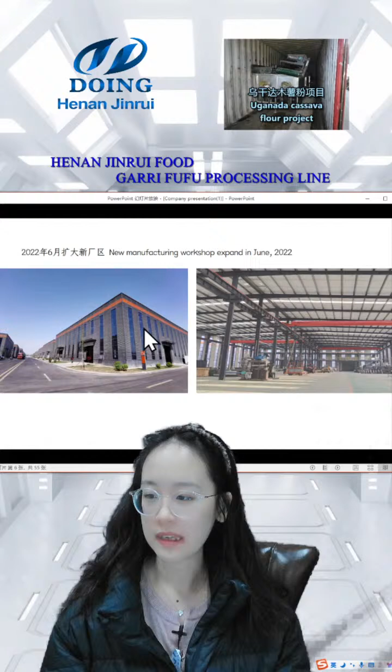This is the factory. Our factory is also in Henan province, but it is nearly a 14 hour car ride to our company. This is what the factory looks like.

And our processing machine is the sweet potato starch production line.

What's your name? Bernard.

Sorry, I may not pronounce it so well, but if you can hear what I said, please leave where you are from. Maybe I will ask where you are from, because we have an overseas warehouse. It's in Nigeria, and it is more convenient for shipping or setting up the equipment, okay?

So here is our processing machine, like the sweet potato starch. We have many different pieces of equipment sent to Ghana, and also DR Congo, and we have an overseas warehouse in Nigeria.

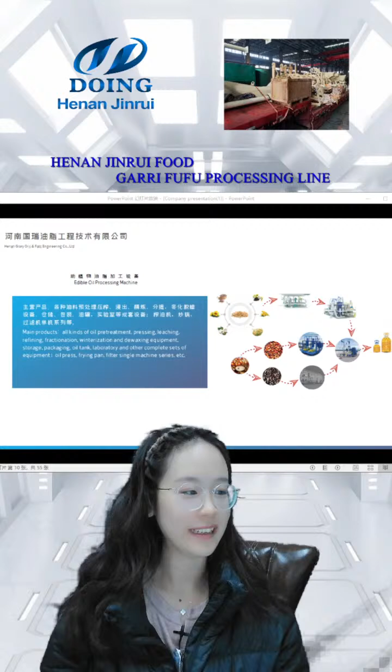Our company also can sell some edible oil equipment like palm oil and soybean oil equipment.

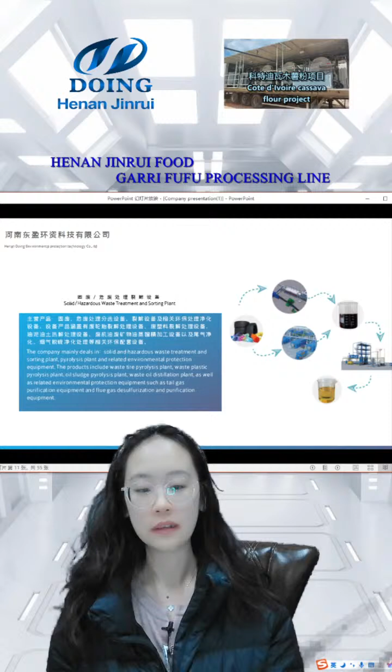And here is something like this - this is a metal and plastic separating machine.

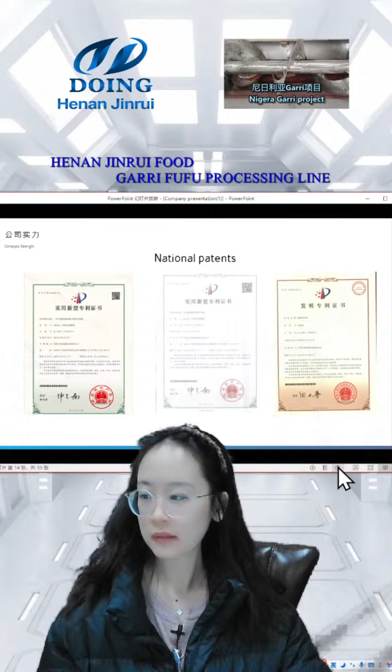And this is our national patent.

So what do you want? Do you want the garri processing line or fufu processing line, and also the cassava starch processing line, or any other? You can tap here.

And I have the 3D animation, I can introduce this for you. This one is our 3D animation for the garri processing line, let's have a look, okay?

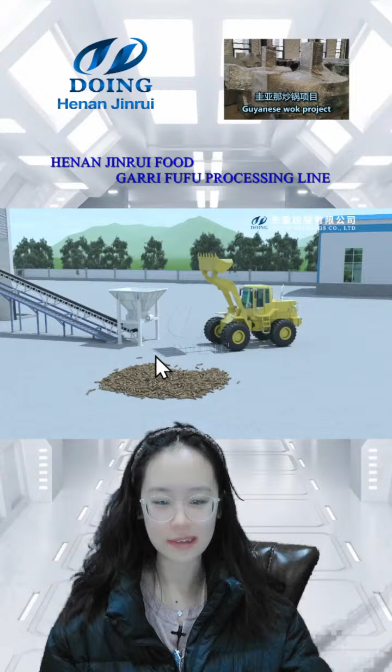So I will introduce this equipment in this processing line. Our equipment is - how to say that - it is like the animation, and I will introduce it, what it can do, what is best, or anything.

First, use the lift to pick the cassava into the feeding hopper. So you can see this feeding hopper, it is shaken underneath at the bottom.

The cassava will be sent on the belt conveyor, and the first machine here is a dry sieve machine, it can...

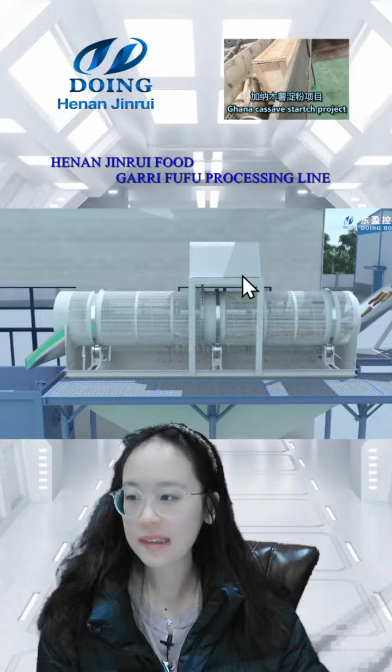And this is our dry sieve. The dry sieve is to friction the cassava in it, and it is rotated, and here comes the debris or the grass and so on.

Hello Bernard, if you are here, please answer my assistant, okay? Hello?

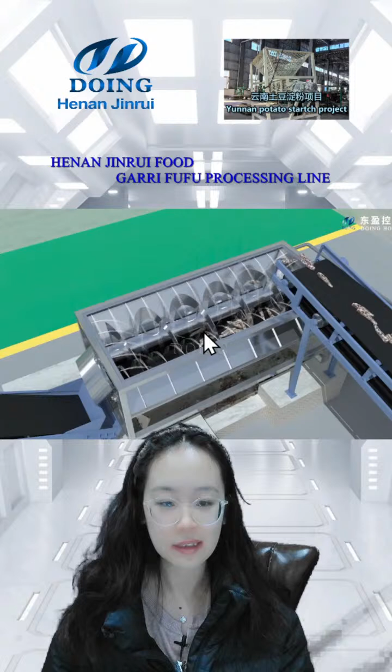In this machine, the sandpaper will friction the cassava surface, so it is easy to clean the cassava skin. And here comes the water. The water also can... okay, salesperson, no problem.

Also the water comes into this machine to clean the sand roller paper, and then the cassava will fall on the belt conveyor again, and go to the grinding machine. The grinding machine makes the cassava into small pieces.

In the grinding machine, if you have a lot of budget, you can also choose the cutting machine, because if the cutting is very fine, the cassava for garri or fufu can be made very thin, and the small pieces will fall into the feeding hopper.

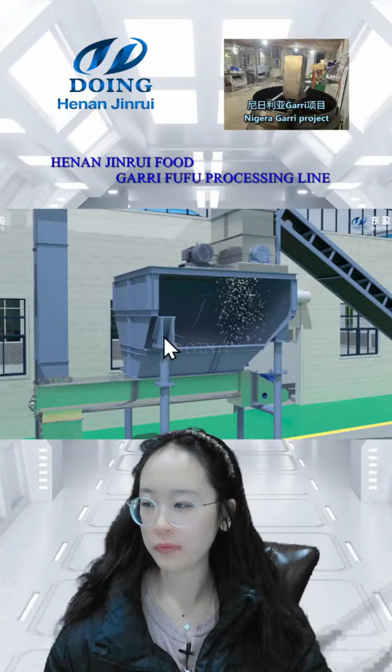Here is the grinding machine again, because the grinding machine can make it even thinner, into small pieces, and go to the flour. And here is the elevator.

It sends the cassava to the tank for fermentation. Our fermentation tank can make the fermentation time shorter, and if you don't need this tank, you can dry it under the sun, that's okay too. But if you use this kind of tank, the time will be shorter.

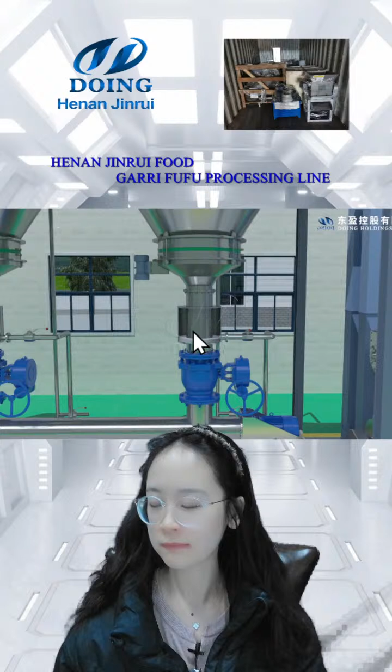Then the cassava goes to the next step. Here is an elevator again, and here is a grinding machine again, because the grinding machine can grind the cassava cake.

Then it goes into the big garri furnace. Our garri furnace has a special feature: it adopts a two-layer design, with heat-conducting oil in the gap between the two layers. Through the heat-conducting oil, the temperature at the bottom of the wok garri furnace can be rapidly increased, thus shortening the time for frying garri and saving your operating time. This is special to this kind of big furnace.

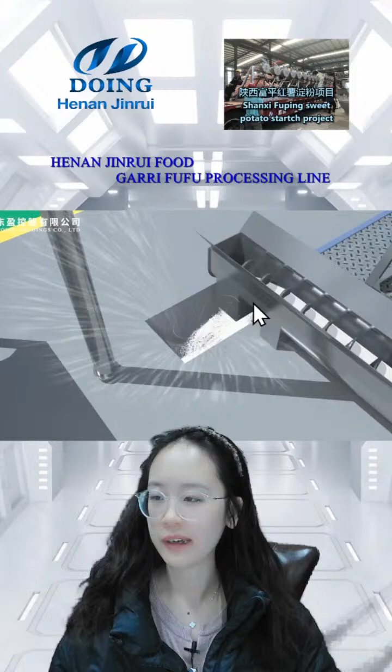Then the garri falls onto the conveyor again - no, this one isn't the belt conveyor, it's another conveyor - and goes to the separation machine, the vibrating machine. Here are two cyclones, and it separates the finest garri, and if any garri is bigger, it will be put into the other cyclone. Here it's ready for packaging.

So here is the whole processing line. If you have any questions, you can ask me, I can answer for you.

And this is the 3D animation. Maybe you want to change one machine or change two, different machines are all okay, because we have different types of cassava grinding or cassava washing machines, and also dehydrating machines.

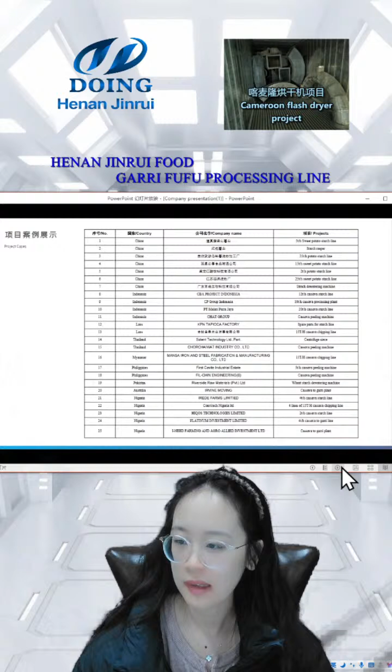And the most important thing is that we have an overseas warehouse. It's in Nigeria. So if overseas customers want our equipment, it can be sent directly to you very fast, because the Nigeria warehouse also has the equipment that you want.

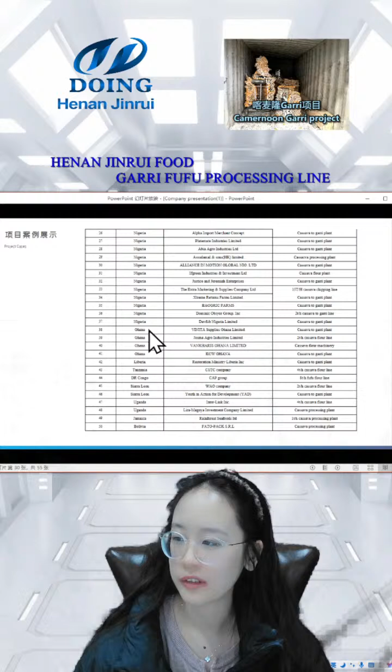Look at here, Nigeria, many Nigeria shipments. And also here is Ghana. Can you see it?

And here is also the potato starch project. This one is in Indonesia, in Nigeria, in Tanzania, and here is the fufu in DR Congo. In Uganda, it is cassava flour.

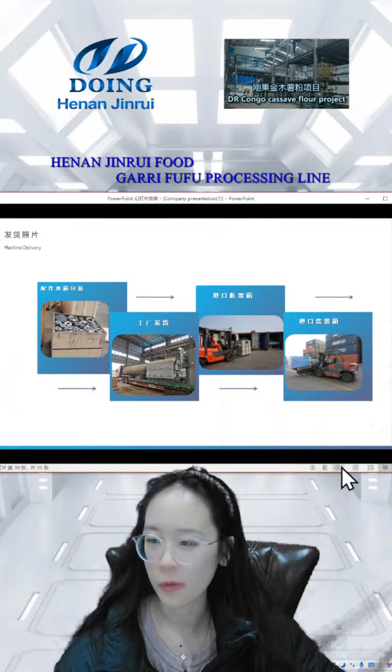And you can see our customers, they are from all over the world. So if you choose our equipment, please believe us, because we can send it very fast, and the packaging is very good, and also our shipment is directly shipping.

I will be in China for the Canton Fair next year. I would love to have a factory tour. No problem, no problem. And welcome to China next year.

And here is the packaging.

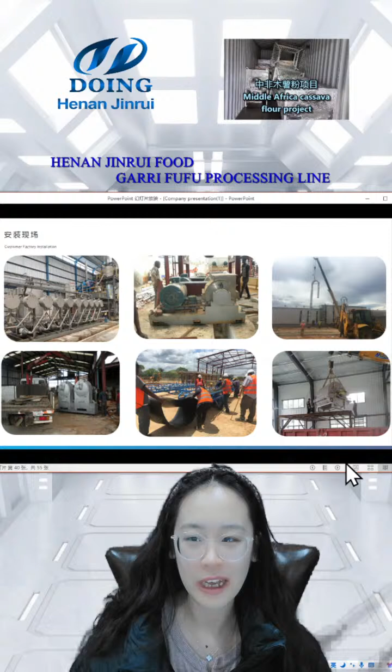But if you want to come to China soon, please let us know, okay? You can directly call our salesman if you have his WhatsApp number. He is in charge of factory installation.

Yes, you can directly point to the WhatsApp number on here.

And the first here is the cassava feeding hopper. It is for short storage of raw cassava and uniform feeding.

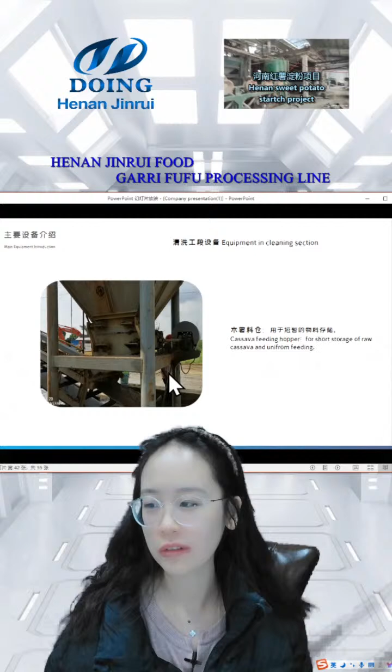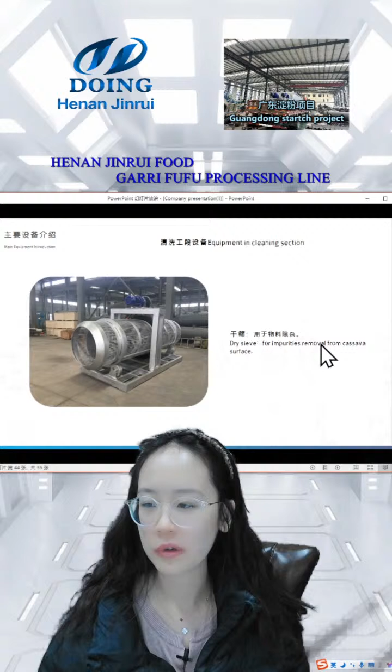Here is a dry sieve. It is very important because it is the first machine in the whole processing line, and it is for friction and to remove the impurities from the cassava surface.

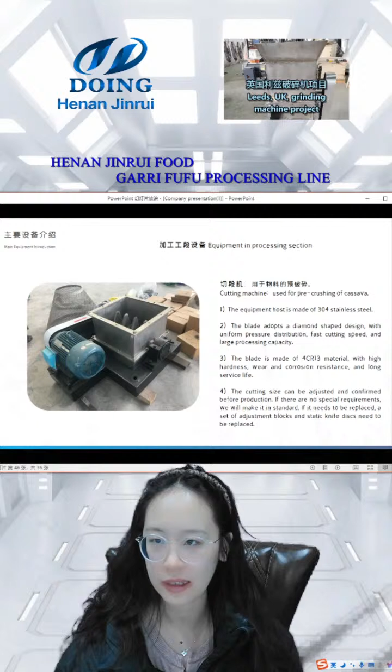Cutting machine. Our cutting machine is used for the pre-crushing of cassava, and this machine is mainly used in every processing line, not only garri but also starch or flour. You can use this cutting machine, but you can also use this one, the rasper.

And here is a centrifuge sieve. It is used for fiber separation. You know, in the cassava there are many kinds of fiber or impurities in there.

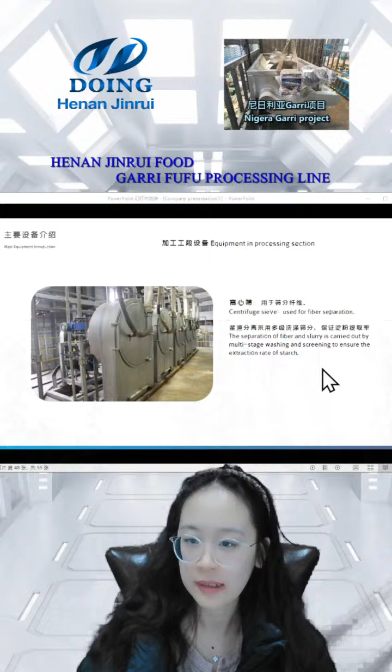And so here is the centrifuge sieve. When the cassava slurry goes into the centrifuge machine, it will wash it, used for washing or separation, for separation of our cassava slurry.

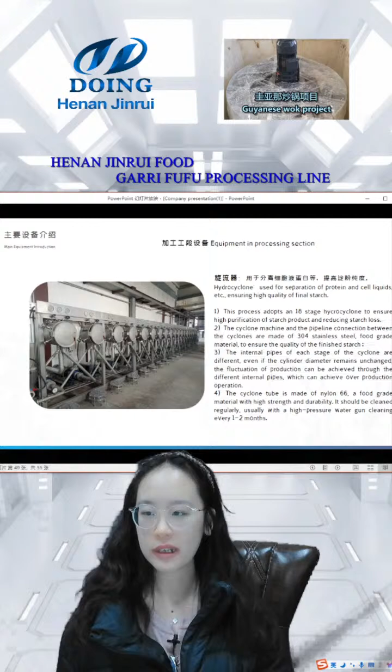This is also used for cassava starch. And the hydrocyclone, we need 18 hydrocyclones, used for separation of the protein and other debris and the cell liquids and so on.

This processing machine is 18 stages to ensure high purification of cassava starch and food grade material. It is very safe for using.

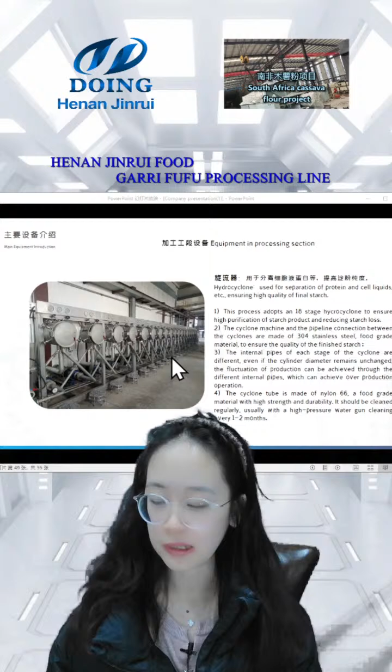And here is a vacuum dehydrator. It's used for starch milk dewatering.

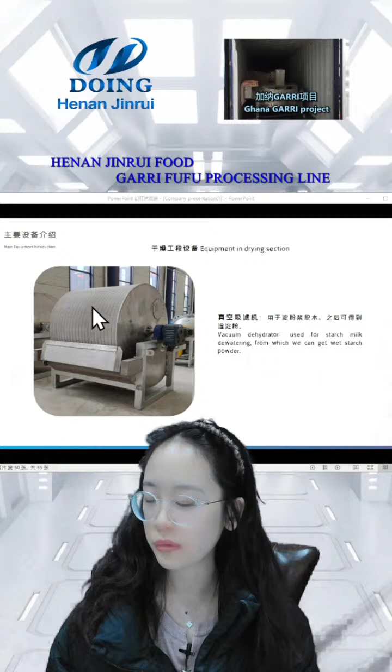And this is a big rotary drum. As the drum turns around, the cassava starch will fall on the surface. It's also used for cassava starch.

And we use a pulse tube design. The pulse tube is one thick and one thin tube. It can make the cassava powder go through the whole tube more quickly, ensuring the drying effect.

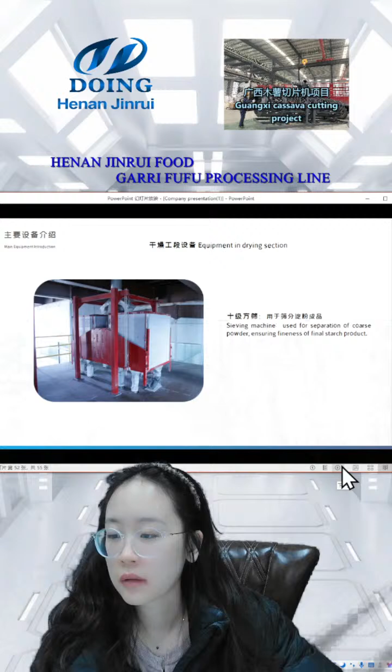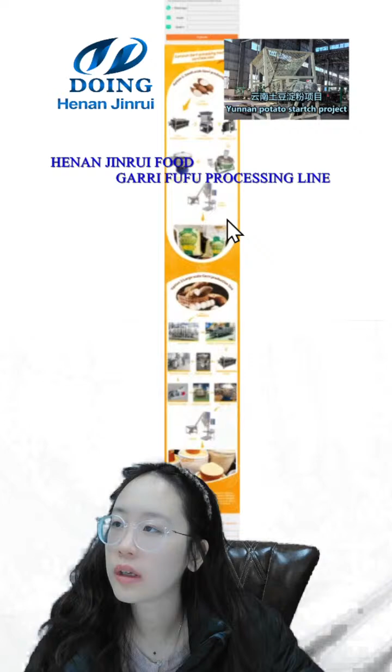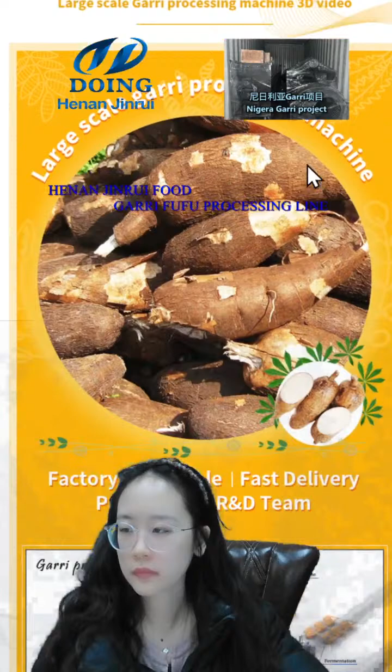Here is our company profile, and also here is the garri processing line. Let's have a look. And here we show large scale garri processing machine, and it's a 3D video. Here is all the things we need.

Please have a look. First, our cassava will go to the peeling machine for peeling the skin on the cassava, and go to the grinding machine to grind the cassava into small pieces, and then go to the crusher. The crusher can make the cassava into very thin powder, and then it can go to the garri fryer.

To fill the garri fryer, you can look at the fryer. We have 2 layers, and in the layers we have a special design: a heat conducting oil in the gap between the 2 layers.

Through the heat conducting oil, the temperature of the bottom of the wok can be rapidly increased, thus shortening the time for garri and saving your operating time. Yes, it's a good way to save your time.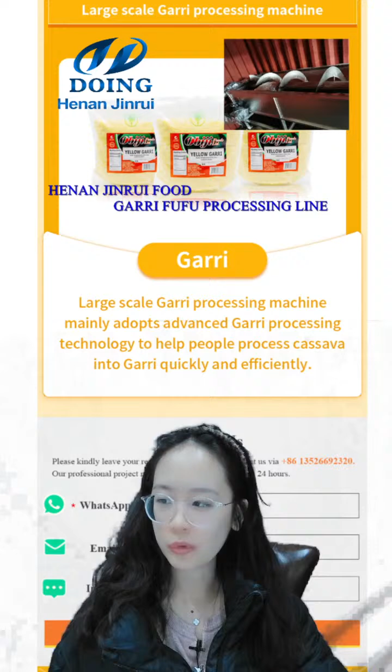And then it will go to the garri. And if you want a large scale processing line, we have that. And if you want a small scale, if you only have 1 ton per hour, we also can give you a small scale production line, like here.

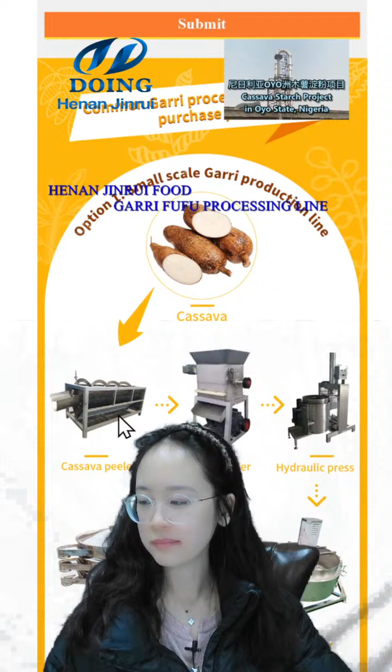It's more direct peeling and grating, and then it will go to the hydraulic press to press out the water in the cassava, and then go to the garri fryer, and then go to the vibration sieve to make the garri finer.

And okay, here can be the packer. This is the small scale. Maybe it looks like the big scale.

And the big scale, we also need a cassava crusher here. But the small scale doesn't have the crusher. Here is the difference. And you can have a look.

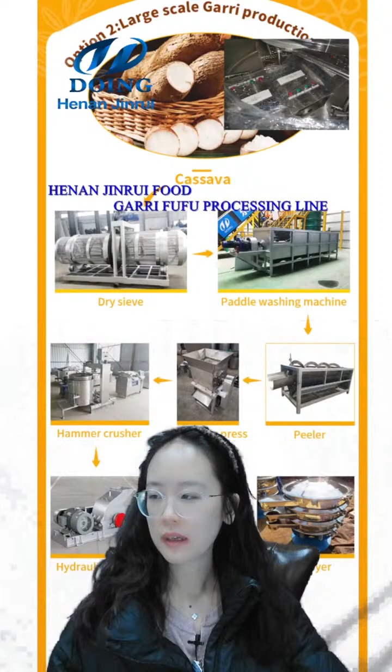This is our machines. Dry sieve first. But if you said that you don't need this, we all don't need it - you can peel the cassava at first. It's all okay, depends on what you want.

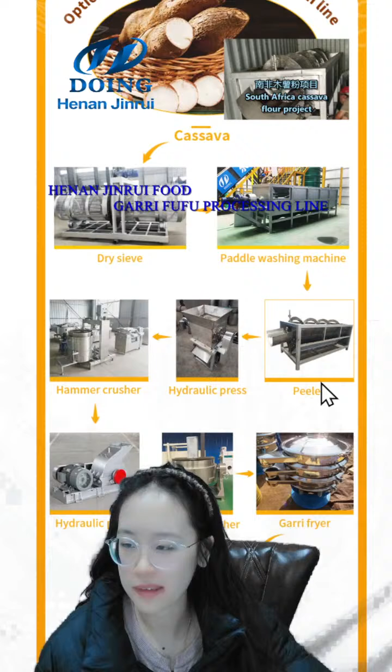Here is a peeler, and then here is a hydraulic press. And then here is a hammer crusher. The hammer crusher can make the cassava finer, improving the fineness of the garri.

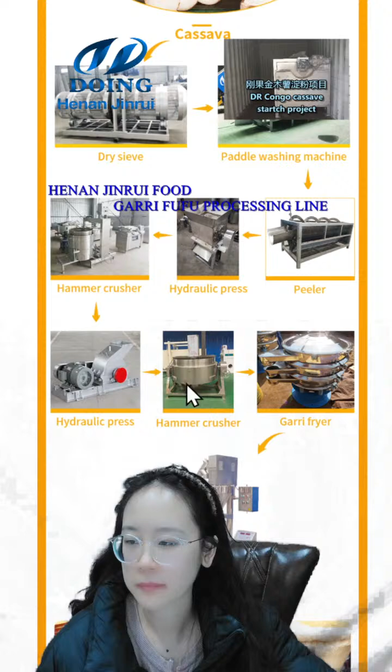Here is a hydraulic press. Oh, then this is wrong - this is a crusher, sorry. Here is a crusher, not the hydraulic press, sorry. And here is the garri fryer. And this is a vibrating sieve.

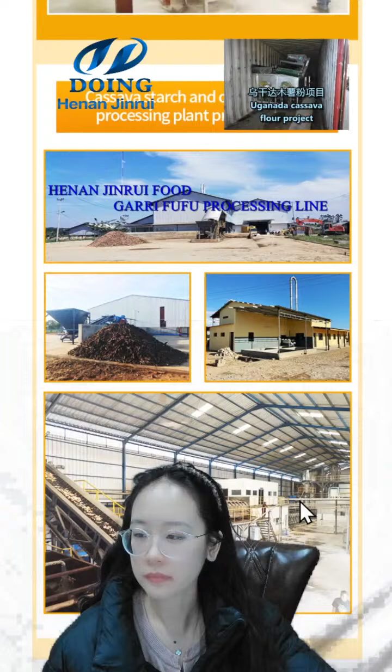We can see here is what all the processing line looks like. Peeler, and here is the dryer system. Here is a grinding machine. And this is all the factory we helped them build in Africa.

Is anyone here? We are the Henan DOING Holdings, and DOING Holdings have many smaller companies. I'm in the Henan JINRUI Food Limited company. So if you want, you can call our company DOING, and also you can call our company JINRUI.

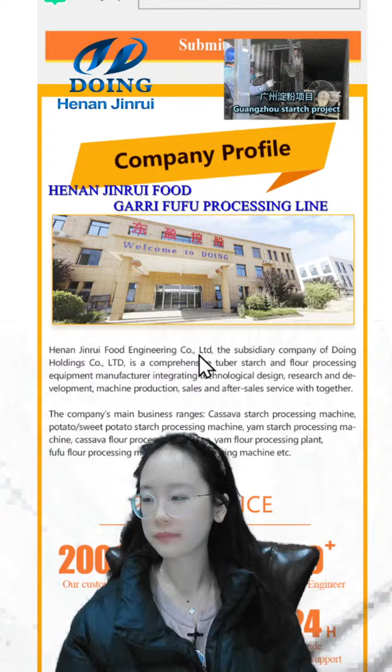Look at here, here is our factory. And also, if you are in South Asia, we also have the cassava cutting to small pieces, cutting processing line. Okay, so we have the cassava cutting processing line.

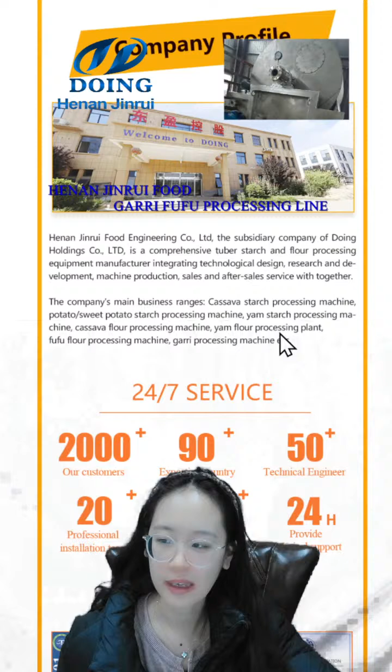We have cassava processing machine, sweet potato starch processing machine, and yam starch processing machine, cassava flour processing machine, yam flour processing plant, fufu flour processing machine, garri processing machine, and also we have the cutting machine to cut cassava into small pieces, which is easier to store for a long time.

You can see here our company has over 2,000 customers. You can see here are the photos. It also shows us the different garri or fufu flour processing lines, and how it is sent to different countries.

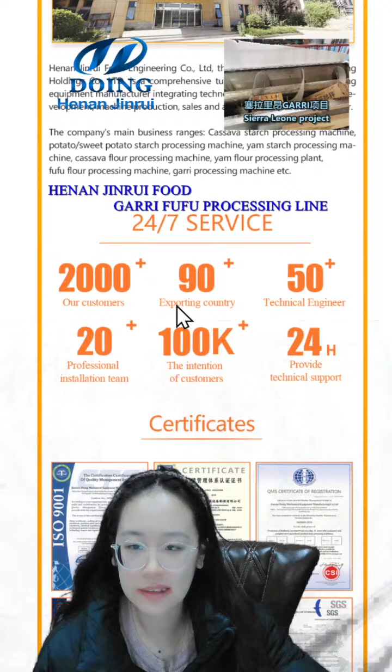And we have machines in nearly 90 countries. And our engineering experience is over 15 years. And we can give you technical support. And here is our certificate.

Okay, so here let's see the garri processing line again.

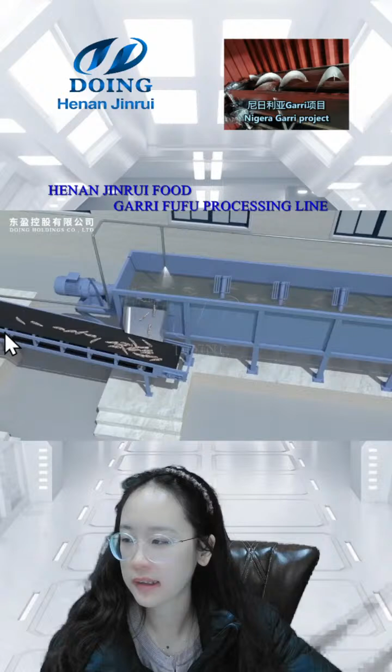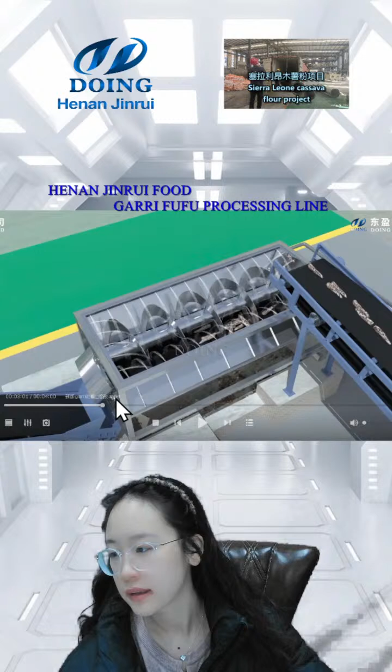Then it goes to the peeling machine to peel the skins off the cassava surface. Under the water, you can see many rollers, and the sandpaper is covered on the roller. If the sandpaper is broken or old, you can change it directly, because here we can see this is a lock. You can open the lock and pick up the roller you want to change, or change the sandpaper. So it's very easy.

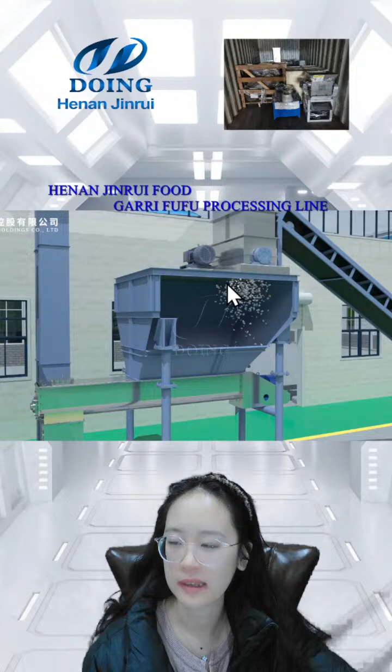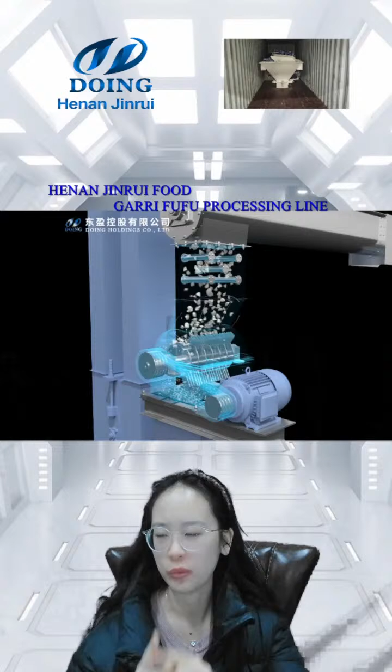Then the cassava goes to the grinding machine for grinding. But here we use a cutting machine. It can cut the cassava into small pieces like this, nearly 3 to 5 centimeters. It's a little big, so we need to grind it again. Because the garri needs to be thinner, and if the cassava is more thinner, the garri will be more delicious, right? So it needs grinding again.

And then it goes to the elevator.

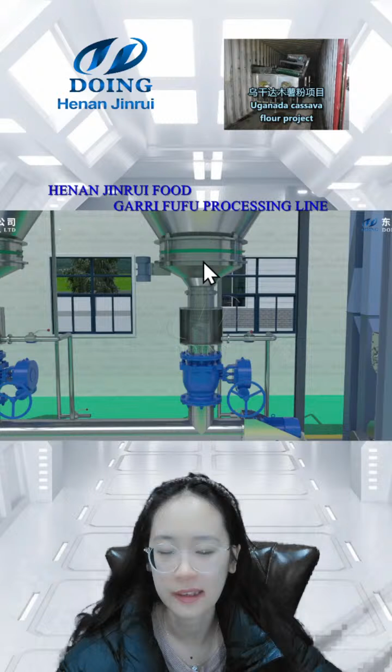Here comes the tank. If you didn't want 2 tanks, you only need 1 tank, that's okay. But if you want to dry the cassava garri under the sunlight, you don't need these 2 tanks. If you want to use this tank, the time to cook the garri can be shorter. It's more efficient.

And then here comes the cassava cake. Here is the garri flour, but it is in cake form, so we need to grind it again to make the garri powder more thinner.

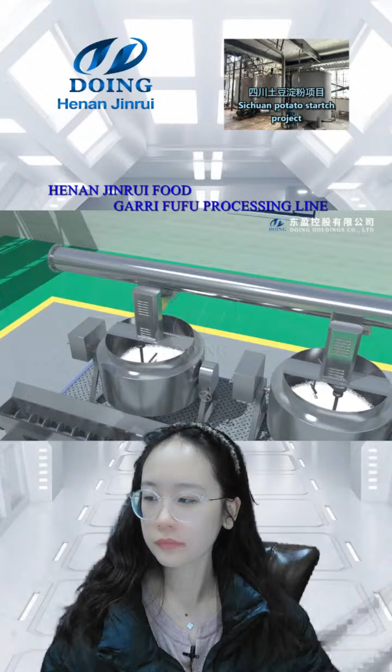And then it will fall onto the belt conveyor.

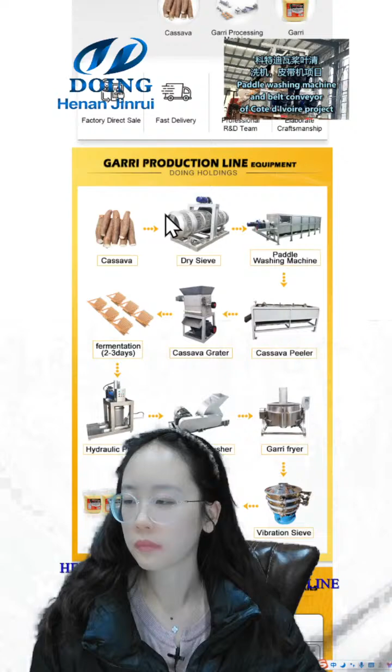Here is a garri processing line, let's look at this again. First, the cassava will directly go to the peeler for peeling the skin, and then go to the grinding machine for grinding it into small pieces, and also you can use the cutting machine.

And then here is the screw conveyor. Here are the 2 hydraulic presses, which can press out the water in the cassava.

This processing line doesn't have tanks, right? So you can put it here for fermentation, under the sunlight. Under the sunlight it needs nearly 2 to 3 days, a longer time. But if you want to get the garri more quickly, I suggest you choose the tank.

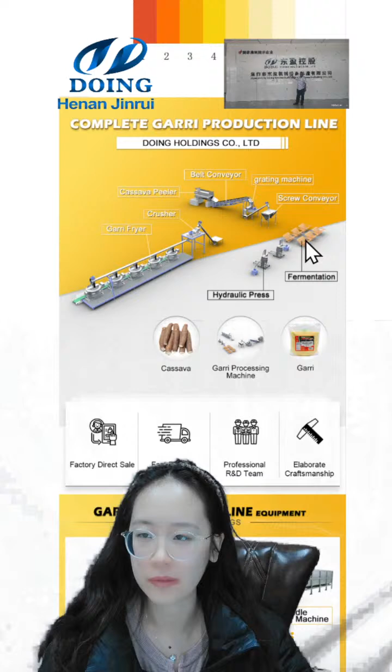And here is the crusher for crushing. The garri is dried under the sunlight, then goes to the crusher to crush the dry cassava cake, and then it can go to the fryer to fry the garri.

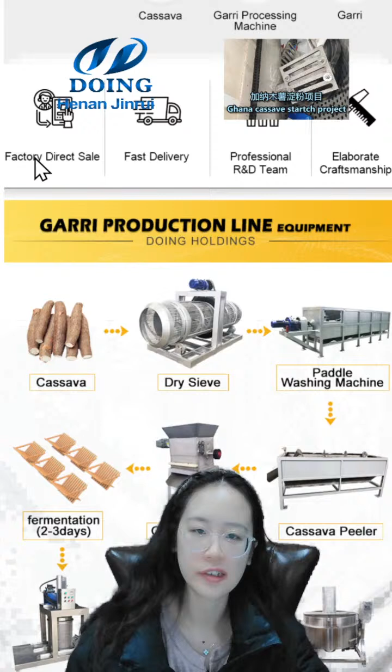We also have the fufu processing line.

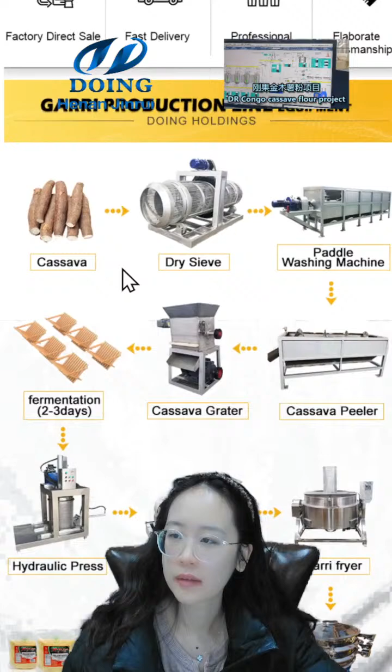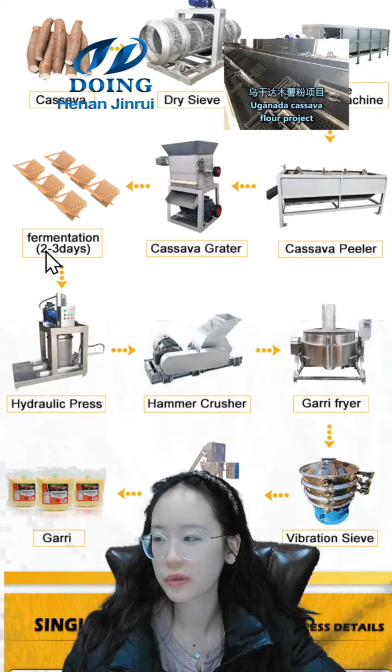We need to use a dry sieve first, and then wash the cassava, and then you can peel it. Fermentation for 2 or 3 days here.

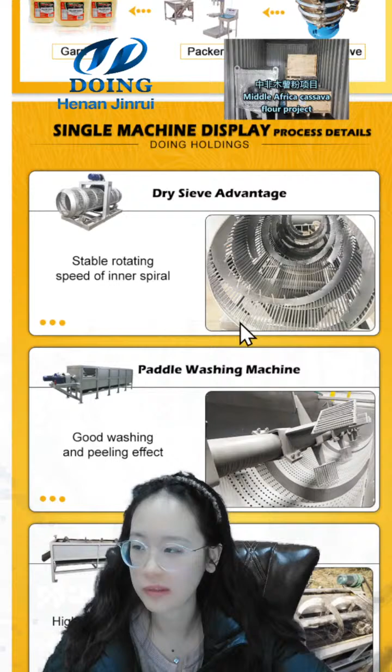So look here is the dry sieve. The cassava goes into the dry sieve and will friction together. Look at here, this small part can also help with the friction.

And here is the paddle washer, and here is the paddle. And the peeler, look at here. We can easily see the sand roller in it, with a high peeling rate of 95%. So this machine is very good to use. And the garri fryer controls the temperature automatically, with eccentric stirring.

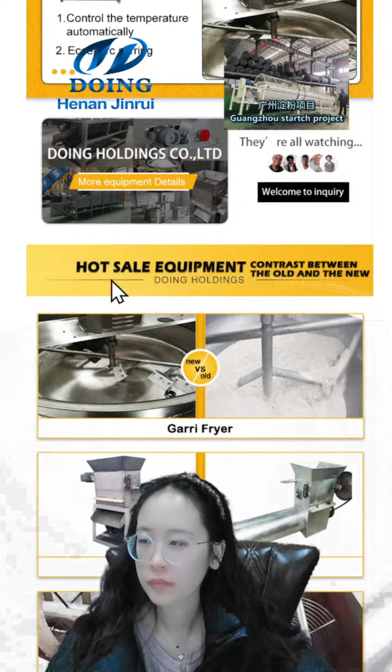The old one is like this, the original one. It has three shafts, right? Three shafts. Our design is not like that, it's only 2 shafts. One is longer and one is shorter. It can shaft the garri in the fryer, and it can be heated more directly to make the cassava garri.

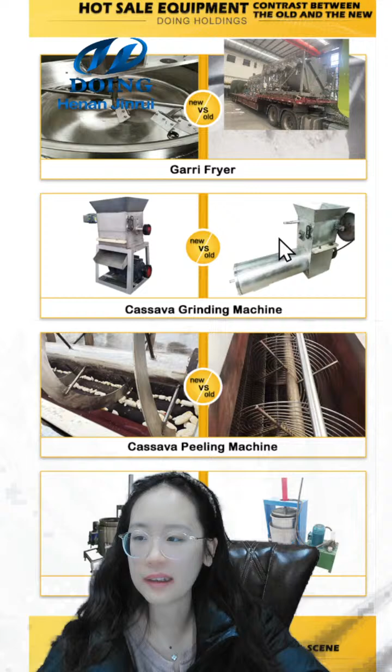Here is the garri fryer. And this is a grinding machine. The grinding machine is very important in the whole processing line, right? And here is the old one and the new one.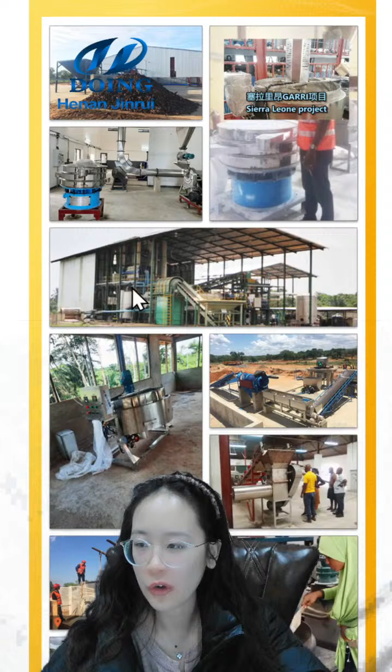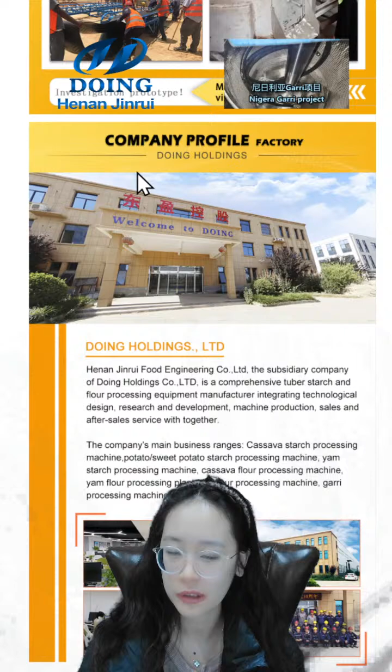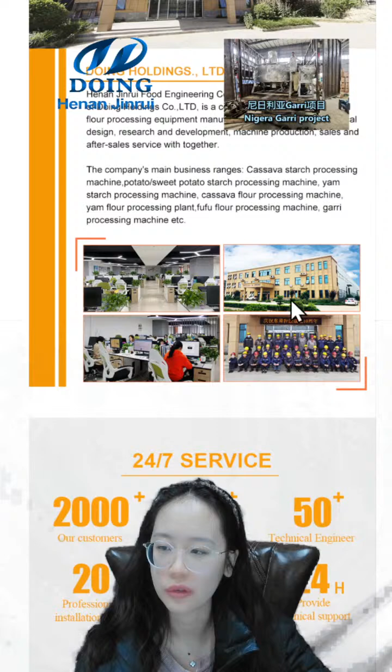Our company mainly does cassava starch processing machines, sweet potato processing machines, potato processing machines, and also garri fufu processing lines. Here is our office, and this too is our company's factory.

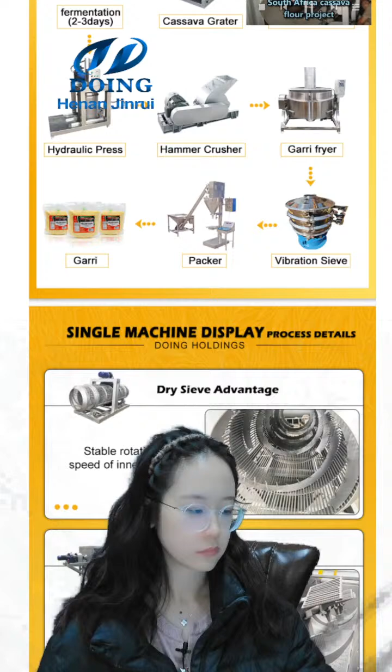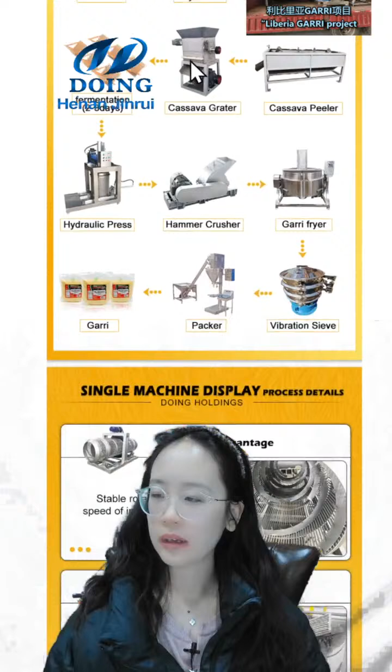Let's see the production line again. Okay, so the cassava first goes to the dry sieve for friction, to remove the soil, grass, and little stones in the cassava, and the impurities will be taken out in this machine. Then the paddle washing machine can make the cassava very clean because it uses negative washing. It is a U-shaped washing machine with many paddles in it, which push the cassava to go around this machine.

And the fermentation, here, this shows it can be fermented by sunlight, but we suggest we have 2 big tanks for fermentation. And then it goes to the cassava grater to break the cassava into very small pieces.

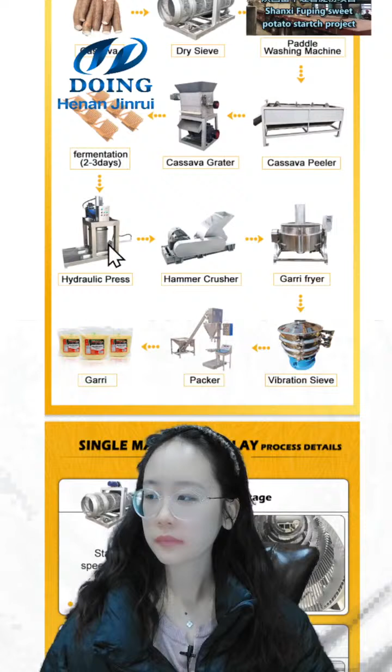And then here is the peeler. The peeler can peel the cassava. It uses a sandpaper roller in it, and it can clean it more quickly. And the hydraulic press presses out the water in the cassava.

Then it goes to the crusher to crush the cassava cake again into cassava powder. Here comes the cassava cake. After crushing the cassava cake, it goes to the fryer to make sure the cassava can be eaten directly, and then to the vibration sieve to ensure the fineness is good, good for eating. Then it can go to the packer for packaging, and then it can be sold.

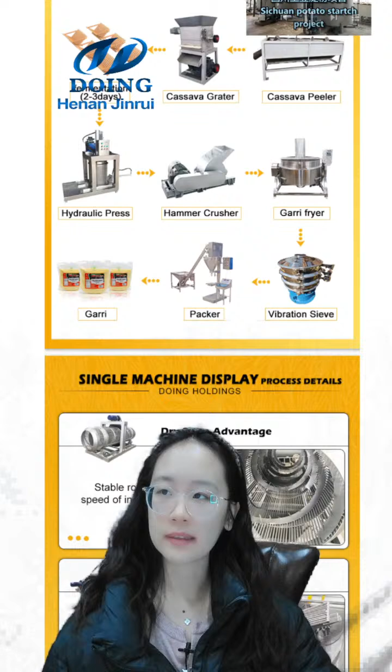Bernard, I hope one day you can come to China, come to our company, okay? And if you can see me, please say hello to me, okay? Bye.